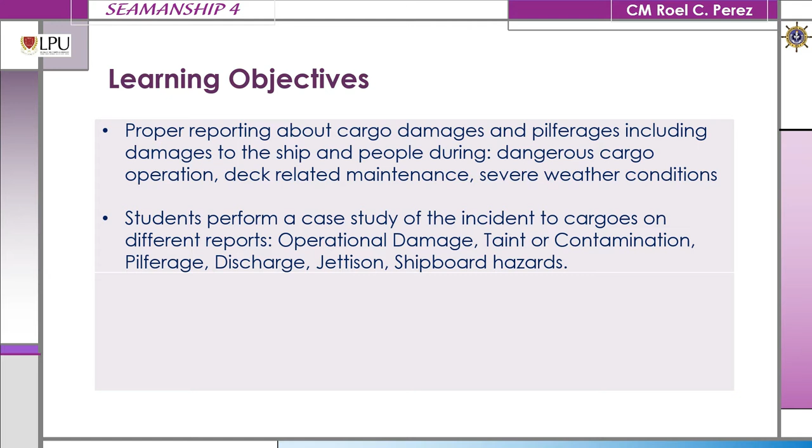So, students perform a case study of incidents to cargoes on different reports: operational damage, taint or contamination, pilferage, discharge, jettison, and shipboard hazards. Okay, cargo damages. So there are three types. Physical damage: cargo is damaged due to mishandling, like dropping, breakages, being knocked during transit, and includes mishandling by stevedores.

Wet damage is damage caused by water ingress to the cargo compartment and includes rain, leakages from pipings, entry of seawater into the holds, and others. Next is contamination damage. Cargo is damaged due to contamination of cargo with other cargo or cargoes. For example, the previous cargo.

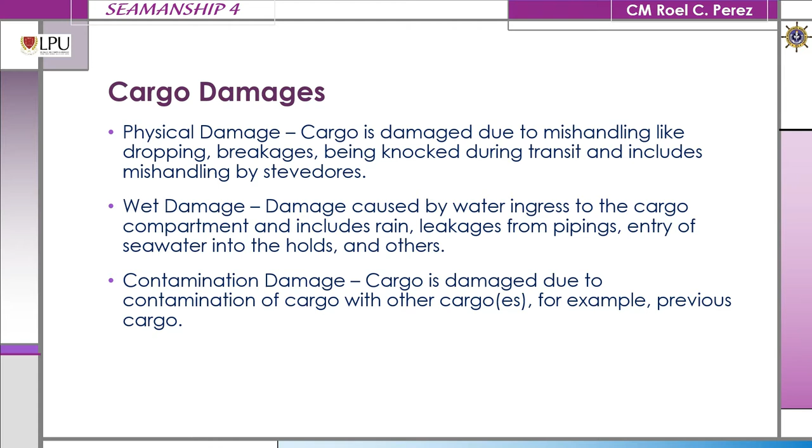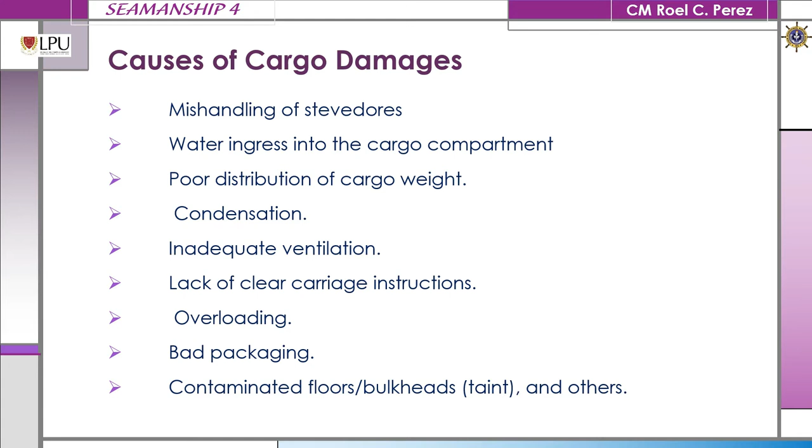Causes of cargo damages: mishandling by stevedores, water ingress into the cargo compartment, poor distribution of cargo weight, condensation, inadequate ventilation, lack of clear carriage instructions, overloading, bad packaging, contaminated floors, bulkheads, taint, and others.

Okay, stevedore damage report. The chief officer must prepare a stevedore damage report at least 24 hours after a damage is done by a stevedore. The safety management procedure has instructions regarding this, and there is a company form that is filled up to be given to the stevedore's representative.

Stevedores sometimes mishandle discharging equipment such as cargo grabs, etc., and cause damage inside the cargo compartment and/or in parts of the vessel outside of the holds. Stevedores sometimes mishandle the cargo itself, such as containers, bags, etc., and cause damage inside the cargo compartment and/or in parts of the vessel outside of the holds.

Next, stevedores sometimes cause damage to the deck gears used in discharging, for example, colliding of the crane jibs. So I have experienced this before. Only a little collision of the crane jibs can give a very big problem to charterers and also to the stevedoring company. On that experience, the stevedores used two cranes in one hold because they wanted to finish the job faster. The captain agreed, although I didn't like it because of this danger.

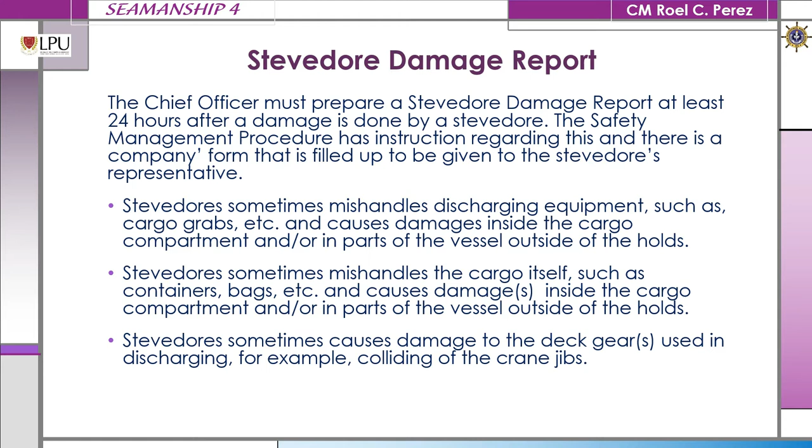I was the chief mate. I didn't like them to discharge cargo using two cranes in one cargo hold. But because there was a request from the stevedoring department through the agent, and the master agreed, this resulted in this accident. So with this little collision, a lot of damage happened to two of the cranes. This is a lesson learned.

Okay, the junior officers must report any damage seen or found to the chief officer so that he can inspect the damage and make the report. And the stevedore damage report is signed by the master and/or his representative and given to the stevedore's foreman or representative. If they refuse to accept the report, then write refused to sign and write details why they refuse to accept it.

The damage is repaired by the stevedores, or if it is a small job, then they can pay an agreed amount with the master, and then it is given to the engine department, who will order the job to the fitter. Okay, stevedore damage report. Several copies of the stevedore damage report are prepared to be given to owners, charterers, the stevedoring company, agents, supercargo if there is one, and one for the ship's file.

Okay, here supercargo is a representative of the owner, who supervises the loading or discharging, but usually loading of cargo on board. Okay, we continue: ship damage by stevedores during discharge. Ships can be and frequently are damaged during the discharging process. Damage occurs when the discharging grab or the bulldozer makes heavy contact with the ship's structure.

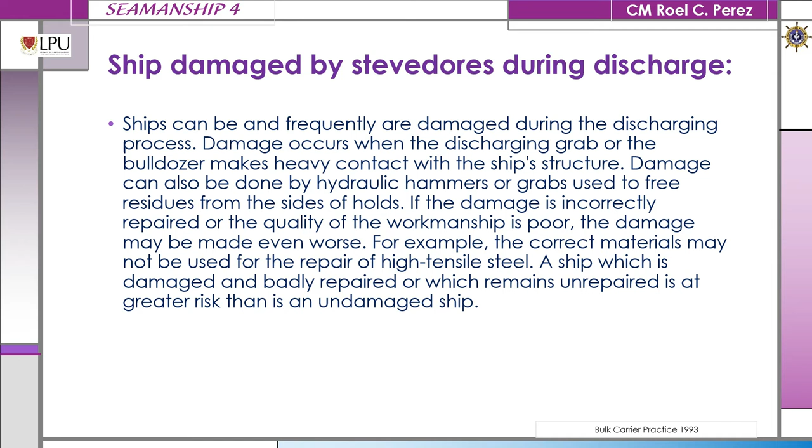So if the damage is a little bit large and it is repaired by the stevedores, there is also a need to call for a surveyor for the flag state. This is a lot of job to do.

Okay, high and increasing rates of corrosion of the side structure and athwartships corrugated bulkheads. High sulfur coal is corrosive, and this is particularly so when it is wet and warm. When the coal is loaded wet, or when sweating occurs because the coal is warm and the seawater on the other side of the shell plating is cold, corrosion is encouraged.

In these circumstances, the corrosion can be highly localized, affecting those portions of the frames and lower bracket connections that lie closest to the ship's sides. So athwartships bulkheads, which form the boundaries of ballast holds, are particularly exposed to corrosion from the damp and salty atmosphere. In addition, all bulkheads, like the ship's side structure, suffer from corrosion caused by problem cargoes.

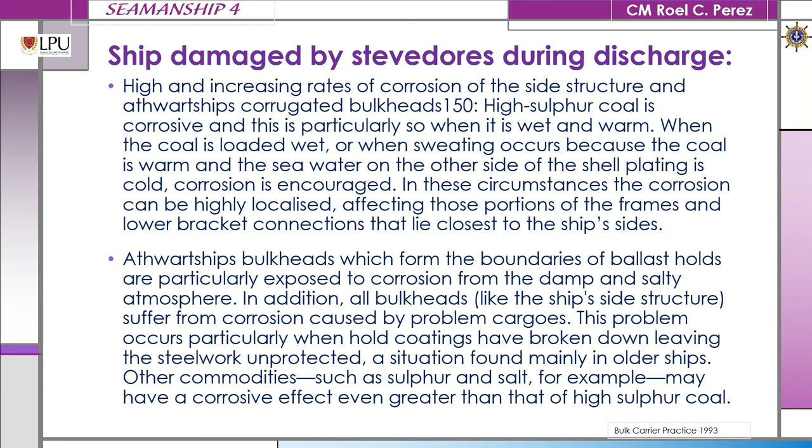This problem occurs particularly when hold coatings have broken down, leaving the steelwork unprotected, a situation found mainly in older ships. Other commodities such as sulfur and salt, for example, may have a corrosive effect even greater than that of high sulfur coal.

Ship damaged by unintentional overloading of particular holds. There are a number of ways, some of them not widely known amongst ship's officers, in which particular holds or blocks of holds can be overloaded. Local overloading of this sort may cause cracking and buckling of structure in both the double bottom and deck areas. An example quoted to illustrate this: cracking of the deck plating at the hatch corner and deformation and/or buckling of plating between the hatchways.

Local overloading can occur when bulk carriers are loaded in ways not foreseen by their classification society or shown in their loading manual. For many years, mariners have assumed that they can adopt any loading distribution unless the loading manual says plainly that they cannot. Unfortunately, the classification societies work on a different basis. They consider that no loading has been approved unless it is shown in the loading manual as having been approved. This has led to misunderstandings and to the adoption by seafarers of unsafe cargo distribution.

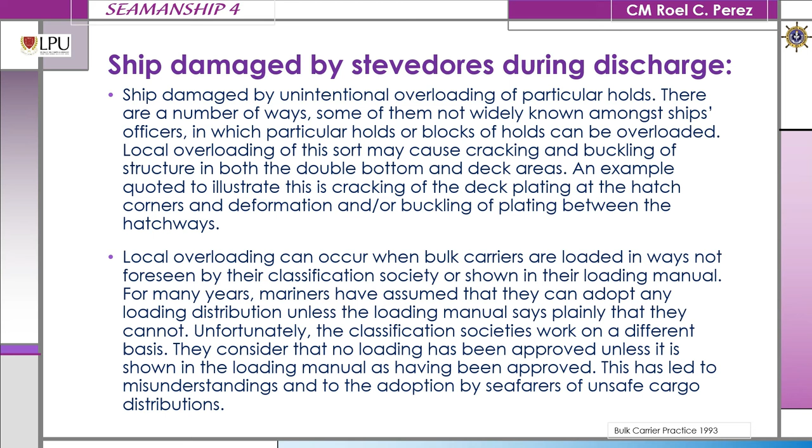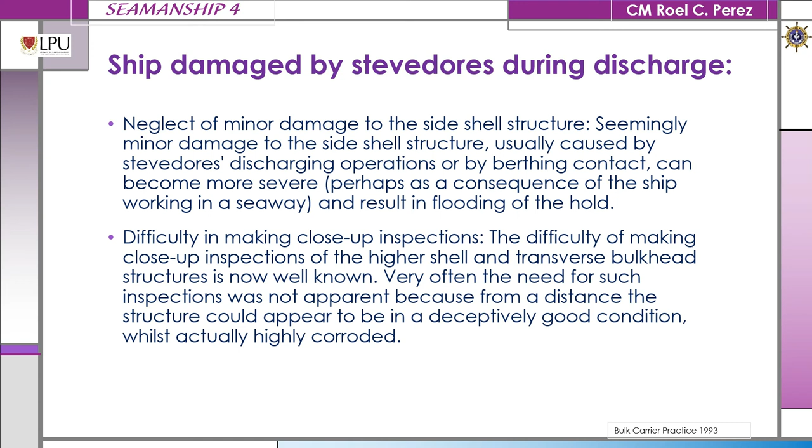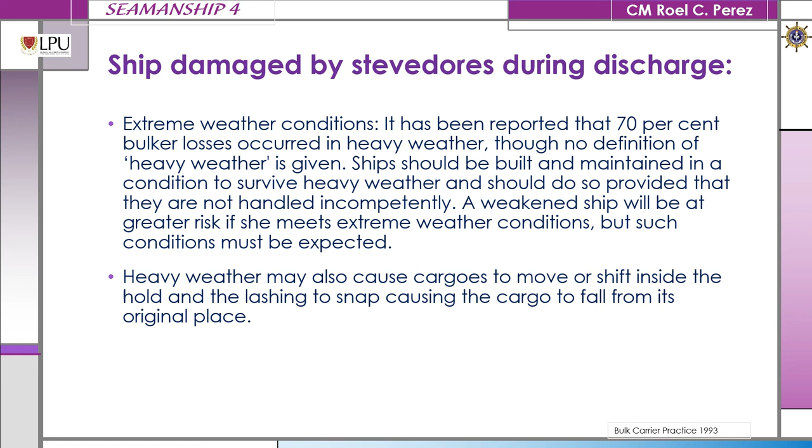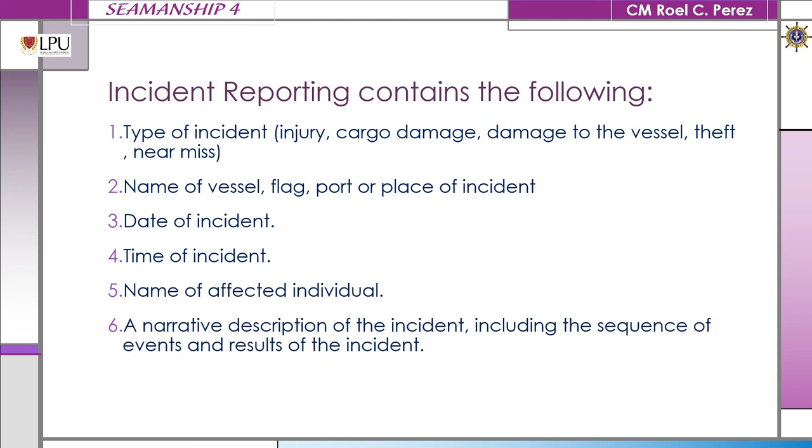Okay, incident reporting contains the following. So type of incident: injury, cargo damage, damage to the vessel, theft, near miss, and others. Okay, consult your safety management manual and procedure regarding reporting of incidents. There are also forms used in incident reporting.

During damage caused by heavy weather, the master may write a note of protest. So a note of protest is a declaration under oath by the captain of a ship when damage to cargo or to the ship is caused by the perils of the sea. The purpose is to protect the charterer or charterers or owner of the ship from liability for the damage or damages.

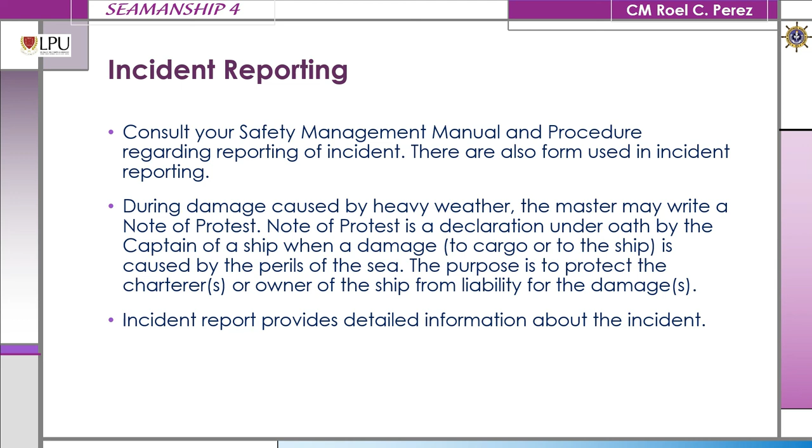Okay, so this is the end of the slide, and we will continue next meeting.